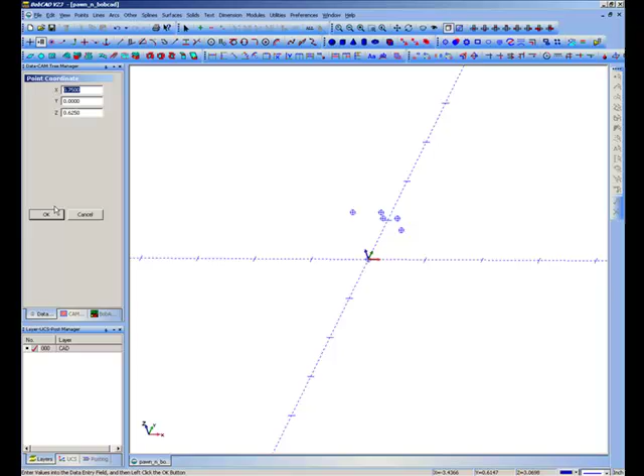Now I'll go to x1 and leave the z at 0.625, put that there. Now I'll go to x3 and leave the z the same - that puts one way over here. Now I'll go to x3 and change the z to 0.6875, which is just going up a little bit.

See, I'm just basically drawing a square - a bunch of square stuff - because all I'll do is use the fillet tool right after that.

Now I'll go to x 3.0625 and leave the z at 0.6875. Then I'll leave it there and put one at z0 - that goes all the way down.

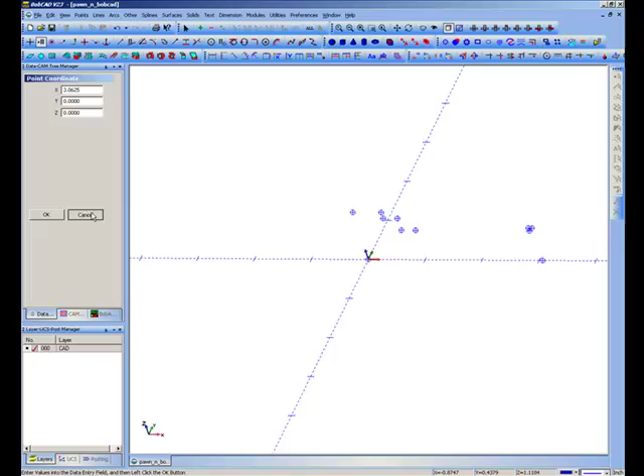Now what I'm going to do is use the line join tool and join all those to make my square. So let's go to line, join - I'll start, click there and join, click and join, click and join, repeating around the shape.

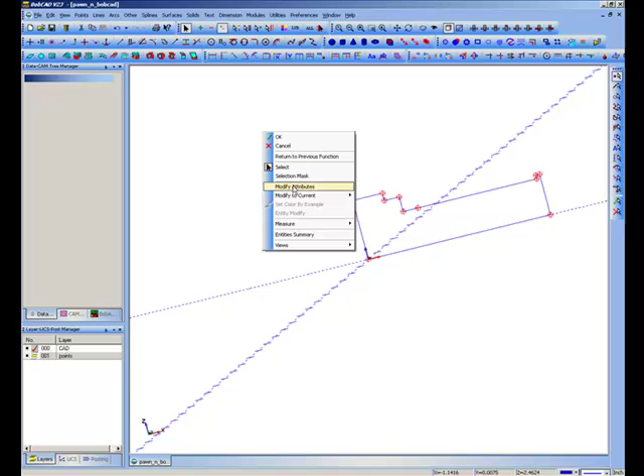Now let's get rid of all those points really quick - we'll put them on a layer called points. What I'm going to do is make it easy: get a point selection mask, which only selects all of them, hit the modify button, and throw them over on the points layer so we get rid of all our points.

Now what I can do is just go in and fillet all those. Let's get our arcs fillet, and for this bottom, let's start over at this bottom one. I wrote these numbers down so I'm not sitting here trying to figure it out as I go along.

Let's go with 0.05. Next one is 0.1. Then we'll skip that one and go to the next, 0.05. We'll put that on that one too. Then another 0.1 right here.

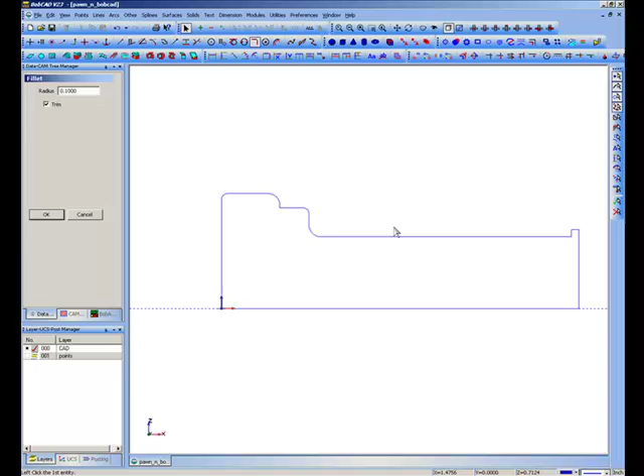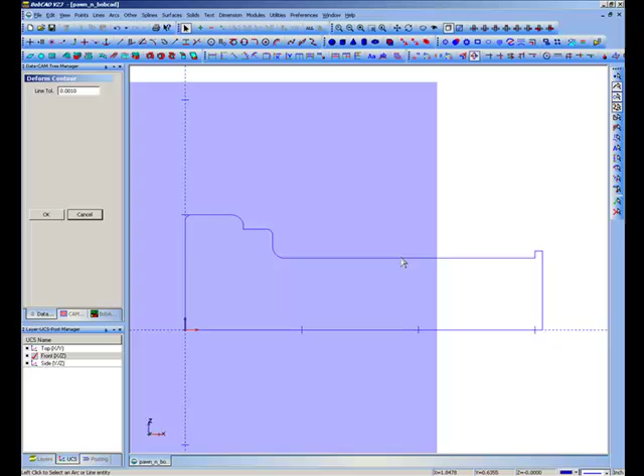Now we can take this straight line jacked across here and deform it down to get a nice curve across the neck. To do that we need to work with the deform tool in that area, so we'll need to switch to the front view. Now we're in the front UCS and front view, I grab my deform tool and give myself some deform. I always have to check it because sometimes it jacks out of the plane - I think you have to make the viewport active at the time.

Now we need to create our ball for the top, so I'll go to arcs again, use snap, and give it a radius of 0.6875, and snap it right here. Let's see if I got it right - I don't remember. Oh, look at that.

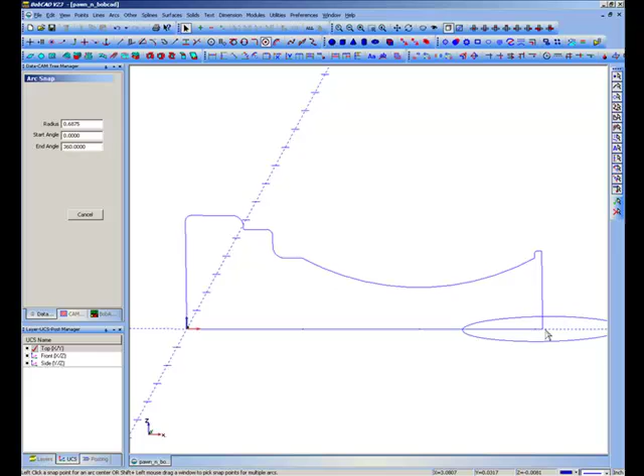Again, since we're drawing in this plane, we have to switch to the front UCS and front view, make sure it's active again, then do that snap arc again at 0.6875, and we'll put it there. Good.

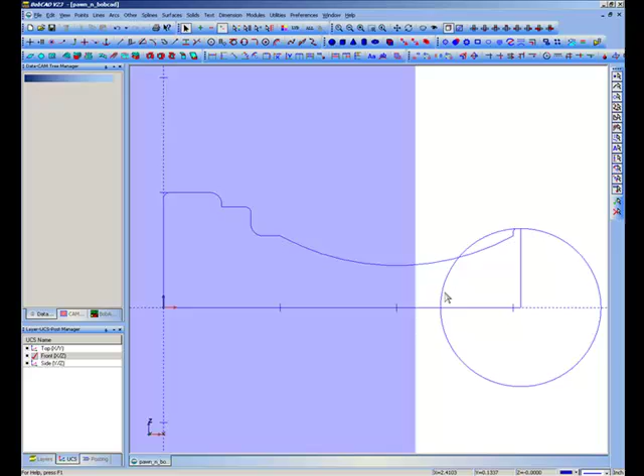Now I need to break that arc and get rid of the pieces I don't want, so I'll choose break entity there, and there. That leaves me that little piece right there that I need. So I can select the rest of this stuff and delete it. Now I can delete this one.

And then I can use trim/extend one entity - I click this one, I click over here, and it magically extends it for me, and now I'm ready to go. So now I can just revolve that.

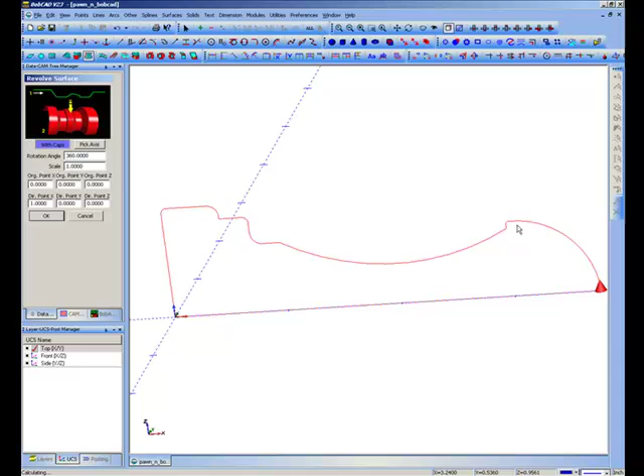Let's pick a 360-degree revolve with caps, and the direction is going to be the X direction, so you just have to put a value in there like 1. Now I shift-click my entity and calculate. It takes a little longer with the screen recording software running.

And there's my pawn, although it might look more like... maybe we should fillet that right there, because that would make that blend look a little better, right? So here, let's undo that.

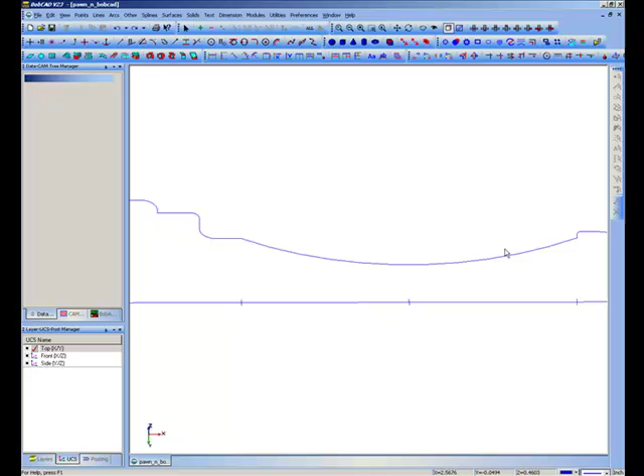Let's see if that's a 0.025 - maybe let's see if that still fits. Yes, much better. Okay, now we'll revolve that.

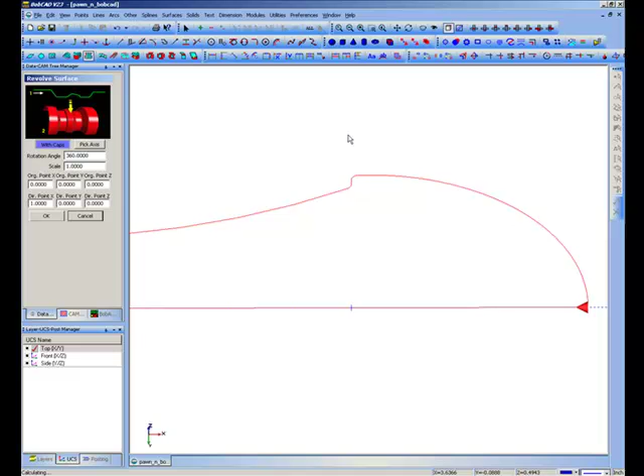Same numbers are still in there, shift click... and there. Probably could have done without that step in there.

Maybe I should just go in, clean out that little one, and make a nice transition, you know what I mean? Or that could just be the look of the pawn you're looking for too. I won't waste too much more time, but you kind of get the idea, I think, right? So anyway, good for now.